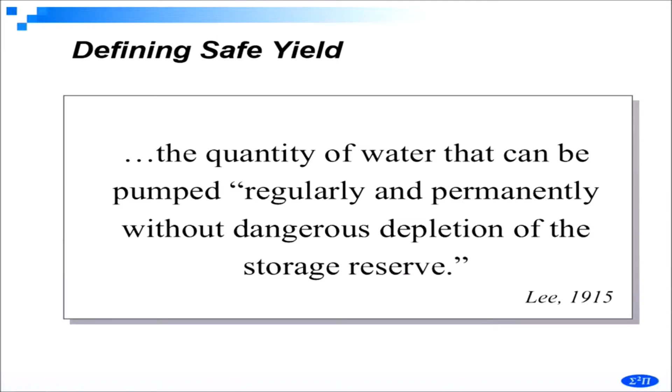the earliest definition, according to Bill Alley, who is going to be our luncheon speaker, who actually has a very good paper on safe yield and sustainability, titled something like 'the journey from safe yield to sustainability,' where he has a very good discussion of safe yield and sustainability and gives some very good examples, which I'm going to be using as well.

So, you want to move this stand over here? Why don't you stand over here? You could stand over here.

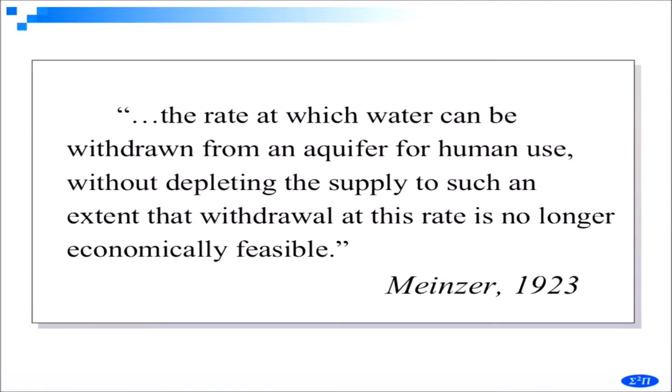The quantity of water that can be pumped regularly and permanently without dangerous depletion of the storage reserve. A little later, Meinzer in 1920 defined safe yield as the rate at which groundwater can be withdrawn year after year for generations to come without depleting the supply. A few years later, he had another definition where he threw in the economic aspects of the development. And about 10 years later, he also introduced that it has to be at practicable rates.

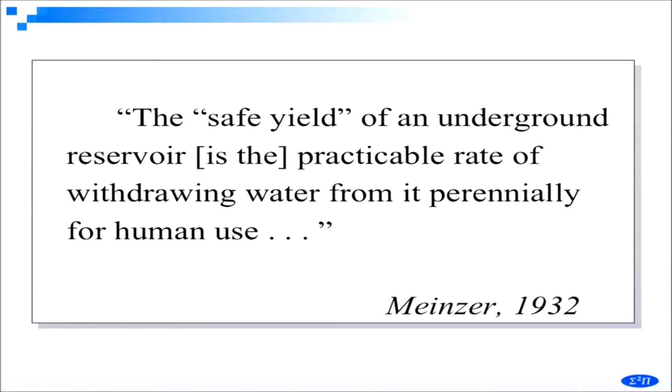So all these definitions kind of imply that if you are going to have it, it has to be sustainable perennially. So the question comes, if you pump an amount equal to the recharge to the aquifer system, is that sustainable or not, or is it a safe yield?

To a certain extent, if the pumpage is less than the recharge or equal to the recharge, you would say that it is sustainable. But is it a wise thing to develop?

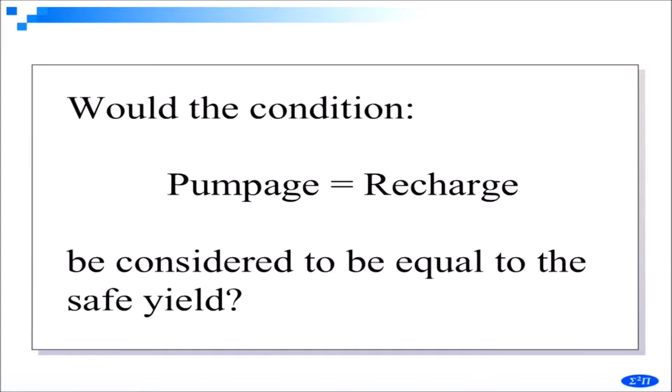Marios Sophocleous gave a publication where he showed an aquifer where you have some recharge, the groundwater flows to the aquifer, and then is discharging where you have some springs and a stream or a wetland which is supported by this discharge.

If it were practicable to put a well system in this aquifer so that you can intercept all the discharge from the system, what you would have is a dry spring, a dry stream, a dry swamp area which will have the vegetation killed.

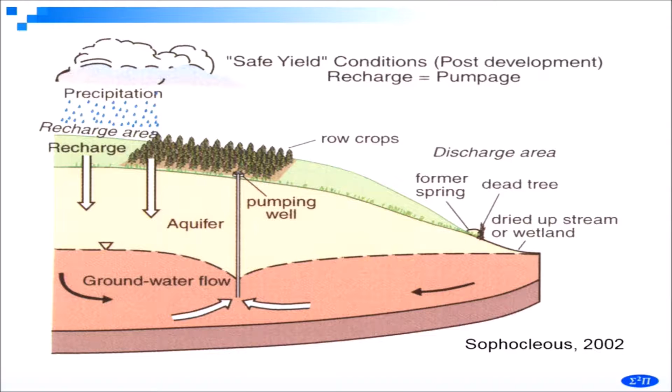So really, considering recharge as being a safe yield is not an acceptable concept. It may be sustainable, but cannot be the safe yield of the aquifer, as there are some consequences to doing this. And actually, the question comes: do we even need to know the recharge to determine how much water we can develop from an aquifer?

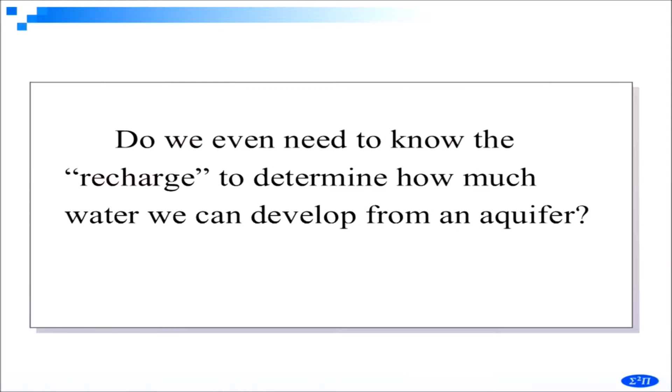John Bredehoeft and Hilton Cooper and I published a paper back in 1982 in a National Academy of Science publication, in the Studies in Geophysics series, which we call the water budget myth. The myth in that paper, as well as in the rehashing of that paper by John Bredehoeft in 2002, is that you need to know the recharge to determine how much water you can develop. You don't need to know the recharge.

I'll give an example. We hydrologists like circular islands as aquifers, especially if they are in a freshwater lake. It makes our boundary very nice. You can apply radial flow equations very easily. So they are a very favorite example.

Now, one can use much more complex systems with all the numerical modeling capabilities that we have. We can do it. But, you know, I'm kind of semi-retired as far as going to work, and all the modelers in my firm are 100% chargeable. So the people that are taking over the management of the company don't look very favorably on my pulling modelers to do work for me that is not chargeable.

So I have to stick with simple models, analytical ones. Very often we talk about virgin conditions. Well, there is no such thing as virgin conditions. Nobody knows what virgin conditions were in most aquifers. Usually you go into the system after somebody has already put in some wells and there is some information.

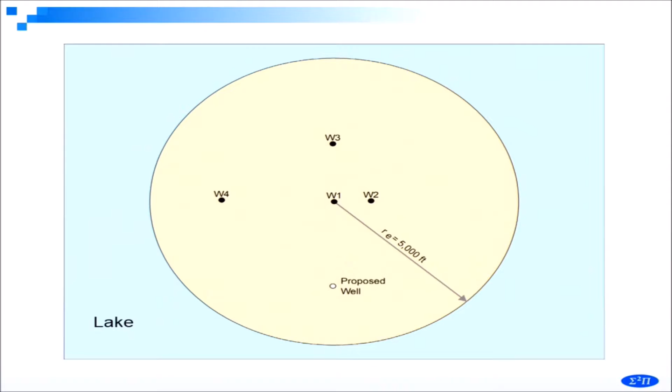The information available from the existing well shows we have a low permeability clay layer at a depth of 80 feet below the lake level, and pumping tests conducted on these wells indicate a hydraulic conductivity of 25 feet per day.

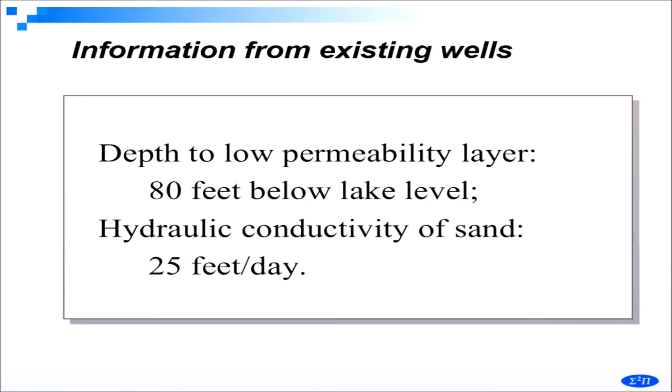What we have as information is the pumping rate of the four wells, which vary from 260 GPM to 300 GPM. We have the pumping level in those wells, plus a report by the driller of what the water level was after completion of the well.

So we go install the well, which we'll call well number 5. We install it, measure the water level at about 80 feet above the clay, and conduct a pumping test on it. It turns out the hydraulic conductivity of the sand is pretty uniform, not different. So how much water can we pump?

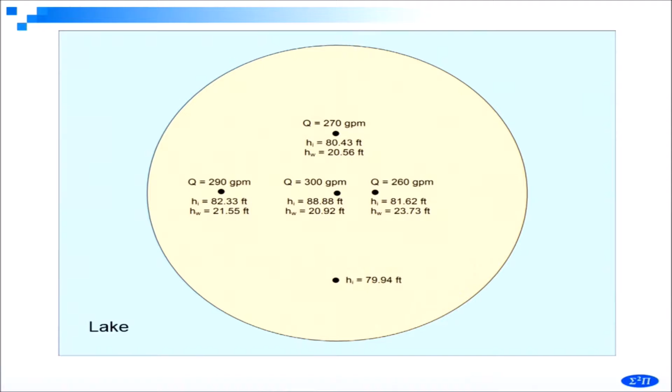One more thing to note is that in general, the pumping water level in all the existing wells is about 20 to 22 feet. So it looks like keeping the water level about 20 feet above the clay seems to be a wise way to develop a well.

It turns out that Jacob in 1950 had an equation for an eccentric well in a circular island where the drawdown is zero along the boundary. And Hantush and Jacob republished a paper looking at leaky aquifer conditions, with both impermeable and constant head boundaries as the outer boundary.

I have adapted that to water table conditions by substituting drawdown minus drawdown squared over 2 times the initial head, and changing the transmissivity to hydraulic conductivity times the initial thickness.

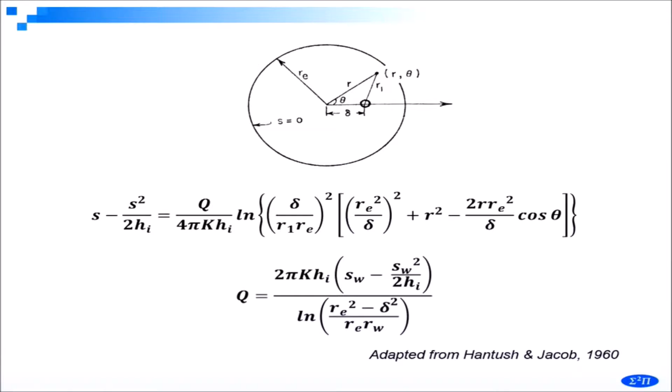So I can solve that top equation for the discharge by evaluating it at the wellhead, where SW is my pump, the drawdown I want to allow at the well. Given that the initial head was about 80 feet, and we have pumping levels around 20, we figured a drawdown of 58 feet would be good enough.

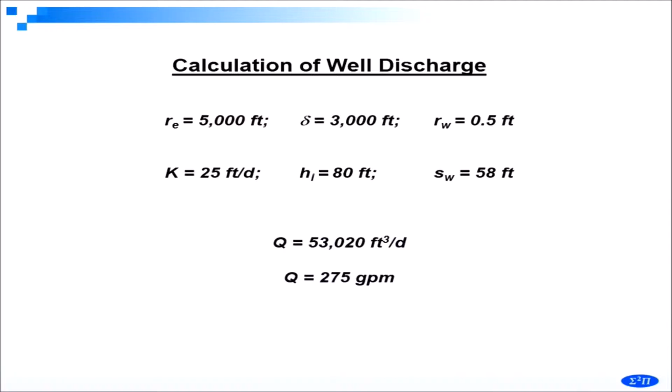And we have the hydraulic conductivity, the effective radius of the island, and the eccentricity of the well, where delta shows how off-center the well is. Assuming a 6-inch radius well, I can calculate that I can pump 53,000 cubic feet per day, or about 275 GPM from the well.

So my pumping is 275 GPM, drawdown around 58 feet, and pumping level of about 22 feet. I made all this calculation without making use of the recharge at all.

But one more thing to note here is that putting in that well is going to have some effect on the other existing wells. A couple of the nearest wells will have about 2 feet of drawdown caused by this new well, and the other two will have about 1 foot of drawdown caused by this new well.

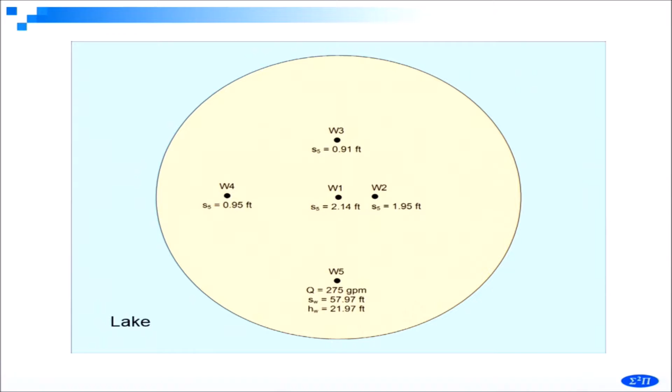So the question is, whereas I can pump that 275 GPM from this well, would that be acceptable to the owners of the existing wells? To a certain extent, with that drawdown, either they have to increase their pumping costs, or they will have to reduce their pumping rates to accommodate this extra drawdown.

Second thing is, where is all this water coming from? Water is coming all from the lake. So assuming that what was being pumped before was acceptable withdrawal from the lake, is pulling another 275 GPM out of the lake acceptable or not acceptable?

So there is something beyond sustainability that has to go into determining a safe yield.

It goes back to Theis, who said that if you have an aquifer system, you initially have some natural recharge, and this is balanced by a natural discharge from the system. Over the long term, looking at averages, recharge equals discharge.

You superimpose a new pumping on that, and you will get water out of storage, and you'll continue to get water out of storage until you cause enough change in the recharge or the discharge, or both, to balance the new pumpage. Until you reach that balancing point, you'll be depleting the aquifer.

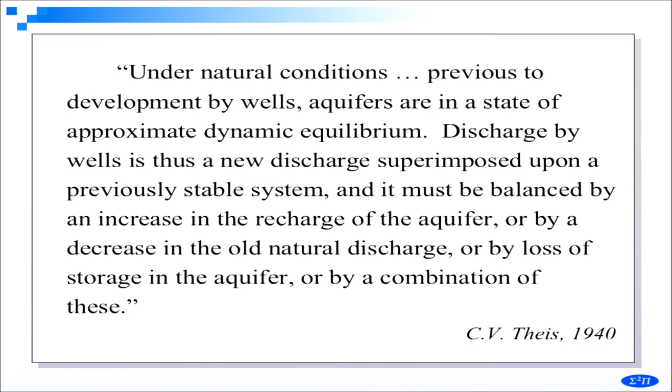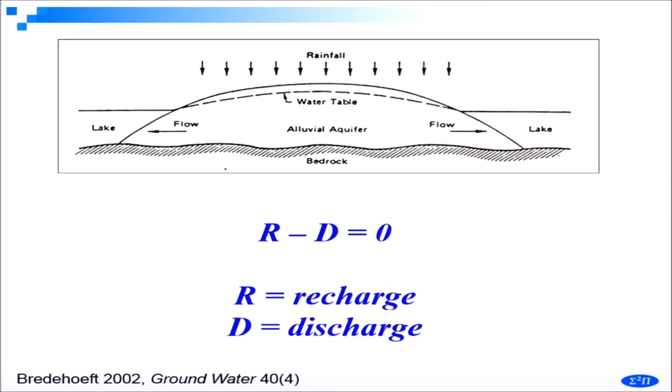John Bredehoeft and our original papers again use the circular island and make the point that before pumping, you have recharge equal to discharge. So when you superimpose a new pumpage on this original condition, you cause some change in the recharge, some change in the discharge, or some change in both.

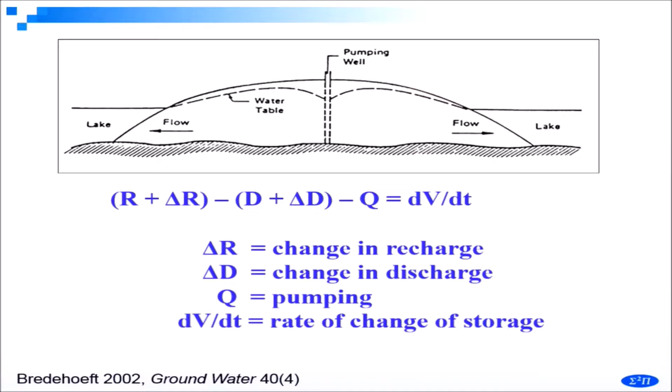But if you look at the top equation, we have R plus delta R minus D minus delta D. We know from the previous slide that R minus D equals 0. So that equation reduces to delta R minus delta D. Both recharge and discharge drop out of the picture.

The only thing that remains in the picture is the change in the discharge and the change in the recharge, plus the change in storage.

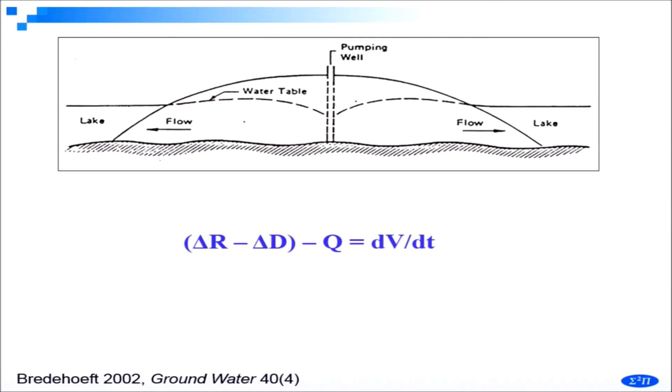Eventually, the change in storage, the change in discharge, or the change in recharge, or a combination of both, balances our pumping rate, and we stop depleting the aquifer. Those changes that balance our pumping rate are what we call capture. The change in discharge plus the change in recharge is defined as capture.

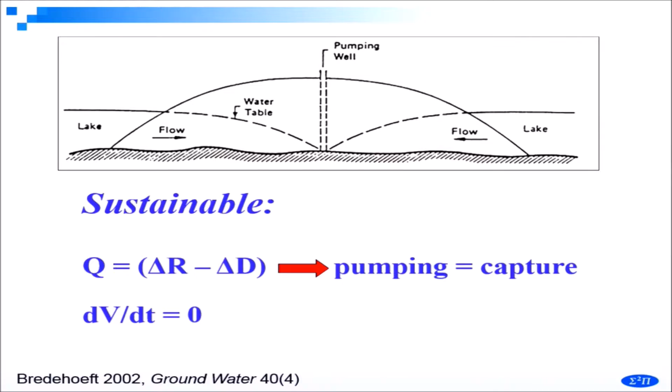Capture is defined, as I said, as the change in recharge. The Water Supply Paper published back in 1972, by a committee chaired by Stan Lohman, which included the who's who in groundwater hydrology of those years, defines capture by referring to the Theis statement I showed, as being the sum of the change in recharge and change in discharge. Then they go on to define what may be capture: reduction or increase in leakage, reduction in discharge, et cetera.

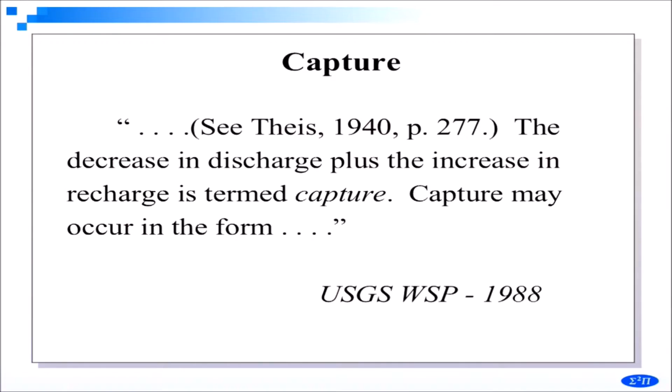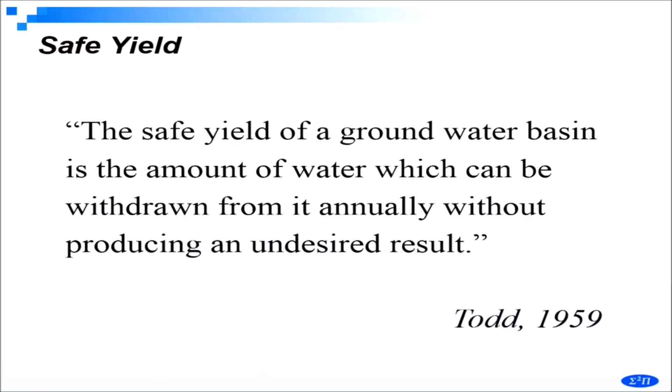So, to go to safe yield, we need one more factor beyond having sustainable pumping. If we balance pumping by changing the recharge through capture, we have a sustainable system. But is being sustainable by itself sufficient to be called safe yield? In 1959, Todd thought this issue was addressed by saying that what you can pump from it annually has to be sustainable without having an undesired result. Now, there's no definition of what undesired result means, but something is undesired.

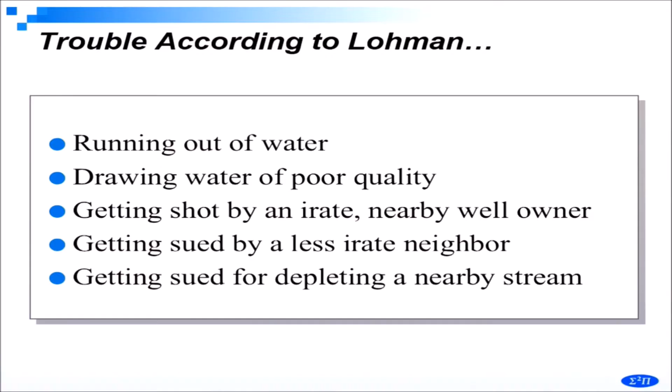Lohman, in 1972, said again about safe yield that there are as many definitions of safe yield as there are people who define it. But nevertheless, he went ahead and defined safe yield as the amount of groundwater one can pump without getting in trouble. According to Lohman, trouble was running out of water, getting water of bad quality, having a neighboring well owner sue you, or being sued for depleting the water supply in a nearby stream. So it is similar to Todd's 1959 definition, but to a certain extent, he has defined what he considers trouble.

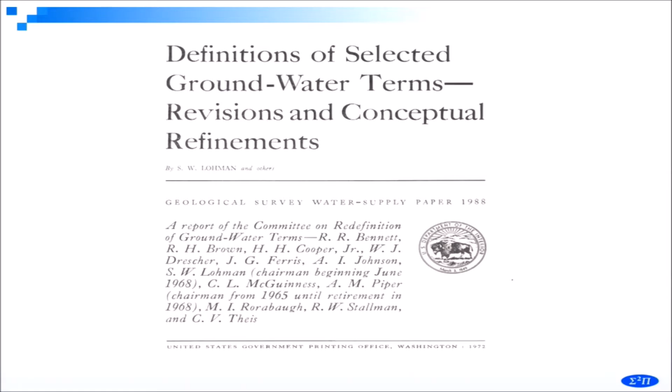The odd thing is that this publication, also published the same year, 1972, as Lohman's, quotes from Lohman's 1972 professional paper on groundwater hydraulics. That same year, they published the definitions of groundwater terms. But when you look...

All right, so if you look at that book, there is no definition for safe yield. Going alphabetically, they go from pressure, static pressure, to specific capacity—no definition of safe yield. So I don't know what's the reason. There are two possibilities: we had so many people on the committee, each with a different definition, so they couldn't agree what to put in the book; or they didn't like the term safe yield. Actually, in the 50s, there was quite an opposition to using the term safe yield. Kazmann and some others thought that we should discard the term safe yield and not use it anymore.

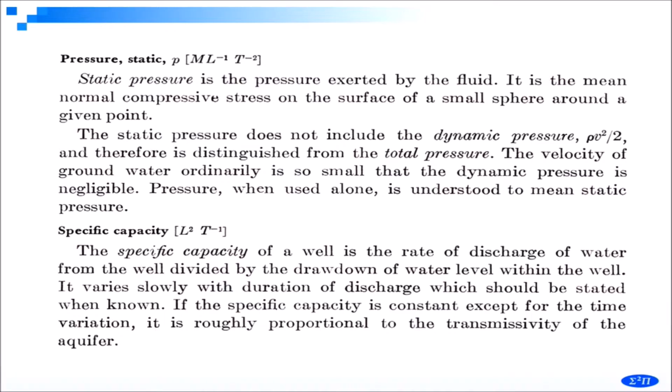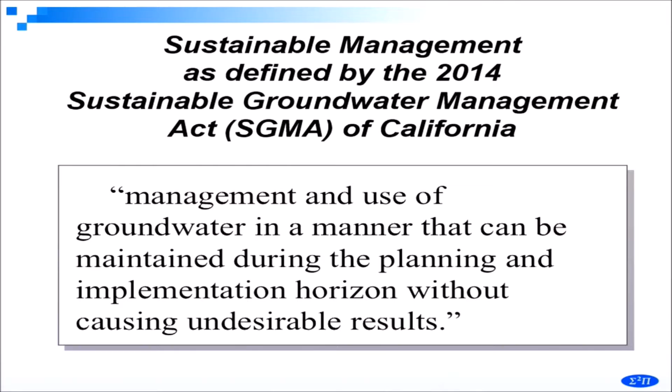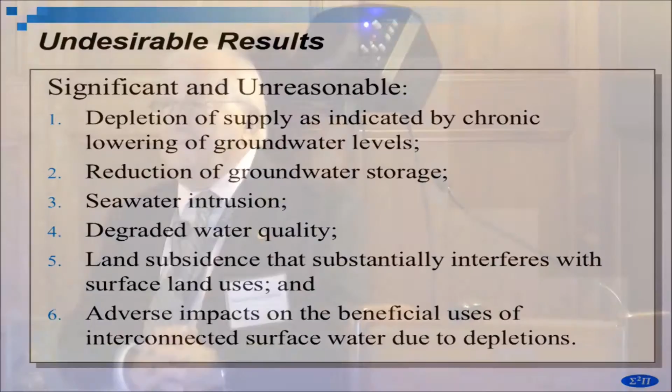But a few years ago, the California state legislature passed an act called the Sustainable Groundwater Management Act, where they define sustainable management of the resource. They say that sustainable management is management and use of groundwater in a manner that can be maintained during the planning and implementation horizon—picking a 50-year planning and implementation horizon—without causing undesirable results. Again, we are back to undesirable results. They define six undesirable results, which are listed there.

Note, however, the first thing they say: significant and unreasonable depletion or lowering of groundwater levels, seawater intrusion, and other things they list. It's clear that they accept that if you have development, you are going to have these effects. So what they say is: go ahead, develop, have these effects, but make sure they are insignificant and reasonable. Because there's no definition of what is insignificant and reasonable, it looks like water managers for different basins have to set their own standards and decide what constitutes an insignificant and reasonable effect.

We hydrologists know how to model groundwater systems. But for us to determine and tell them how much water they can develop sustainably, we need to know what their acceptable levels of these effects are. They have to define that, and then we can do it.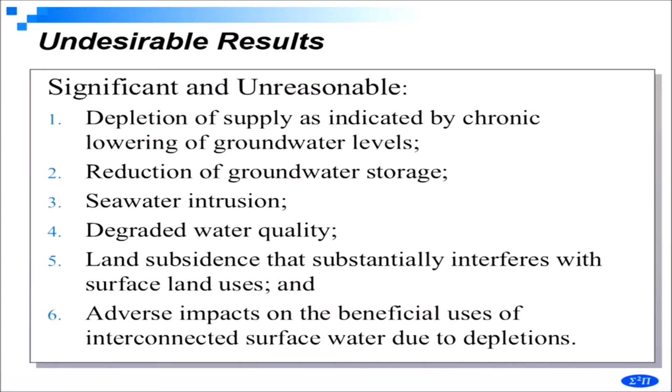One more point I want to make, using an example here. It's actually a model by Prudic and Herman, I think back in 1996, which Alley and Leake had included in their paper on the journey from safe yield to sustainability. This is a model of the Paradise Valley.

The natural flow or natural recharge to the system is 91 million cubic meters per year. It's an odd number, but USGS has been on a roll that you have to use metric system since 50 years ago, with the hope that everybody is going to change to metric. Nobody changed yet, except they still have things in metric units. 91 million cubic meters per year is on the order of 70 to 73,000 acre feet. Talking about odd units, acre feet is a good odd unit.

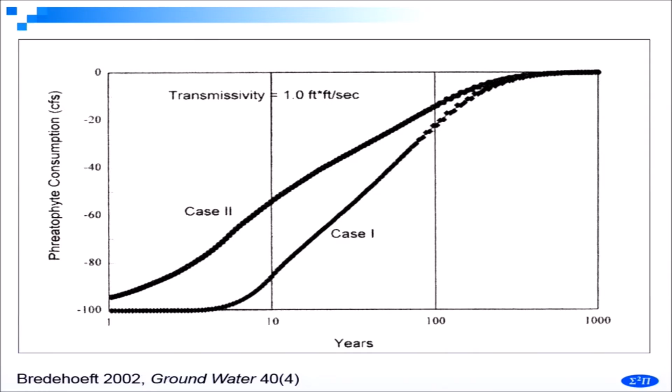So, to summarize, I have three points. Sustainability of a groundwater development depends on the capture that you can induce by that development, rather than on the natural recharge or discharge from the system.

Safe yield, in my opinion, is the maximum water that you can sustainably develop from an aquifer without causing any undesirable or unacceptable effects.

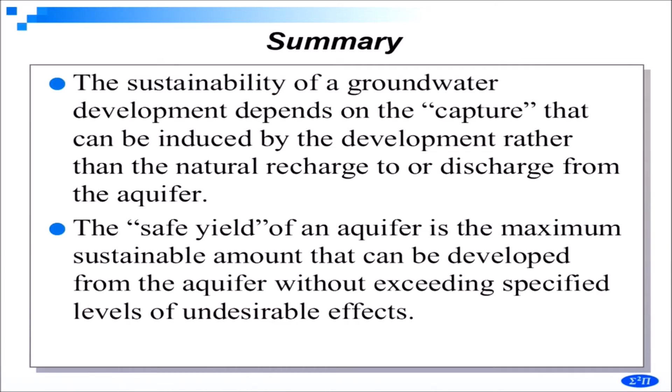Finally, the points I made: the time required to achieve sustainability depends on the boundaries of the hydrologic system, the nature of the discharge and recharge mechanism of the system, and the location of the development with respect to these boundaries and mechanisms. That's all I have to say.

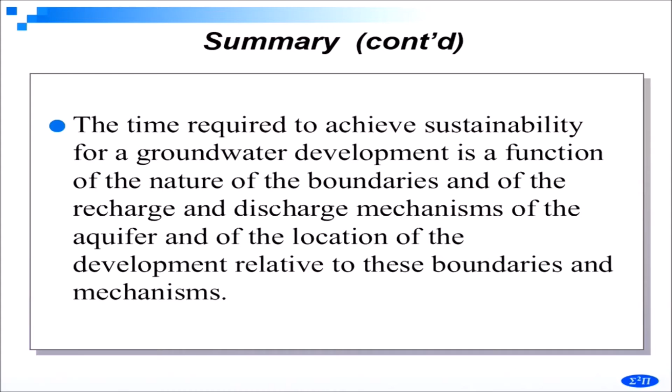The only thing I would add here is because Bridget yesterday made a statement. She said years ago when she first started working with us, I told her that recharge is kind of like a black box, you don't know what's happening.

So she said she stopped working on it. I want to make sure my statements about recharge don't cause her to stop working on recharge, because what I said is that you don't need to know the recharge to calculate development, but I didn't say recharge is not important. It's definitely important because recharge is reflected in the water levels you measure, and the higher the recharge, the higher the water levels. The higher the water levels, the greater the available drawdown, and hence the greater the amount of water you can develop. So recharge may not need to be known, but it is definitely a very important factor in how much you can develop from an aquifer.

Let's take a minute for questions for Stavros. Oh my God, I took too much time, did I? Anybody have any questions? I have one question. Very interesting talk.

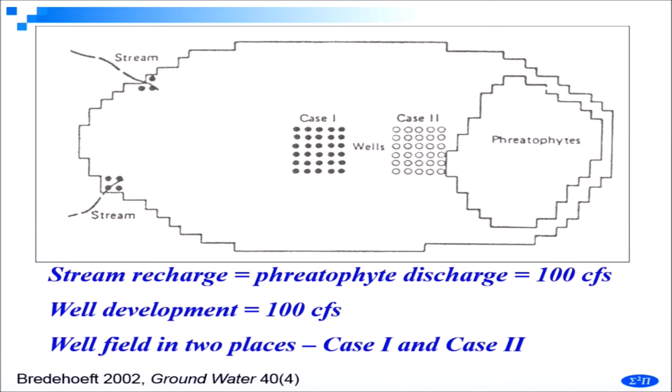So could you please explain what's the intuition behind these changes over years? How do you calculate over time period? Can you speak up? How did you determine, how could you calculate, like, over 300 years projection?

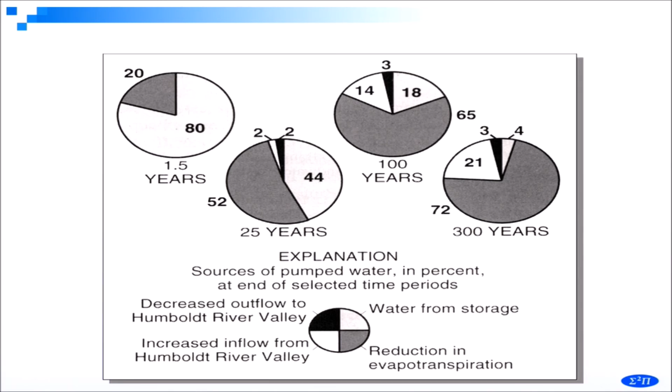This was a model, a numerical model of the Paradise Valley, which extended over time. They used the model, put in the pumpage, and ran the model for 300 years to see what the effects are. At those intervals, they look at the mass balance, where the water is coming from and where it's going.

The numerical models that we have now all have a mass balance in them. So you can inquire the model to tell you where the water is coming from and where it's going at any given time.